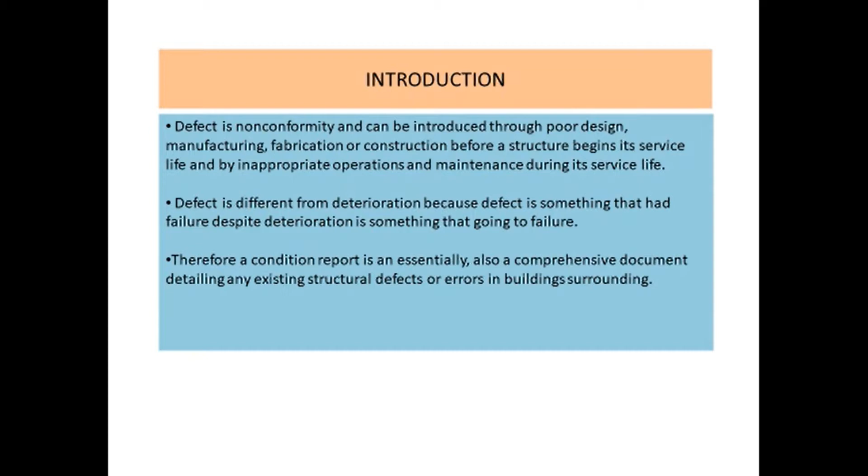About the inspection, this report is about identifying and inspecting the defect found in the arena UPSI, located within the compound of UPSI. The defect investigation was convened on Thursday, April 27, 2017, and it consists of 20 students and a lecturer in the master program. General briefing from UPSI officer started by welcoming our delegation, giving background on UPSI, and introducing the organizational structure and whole facility that UPSI has to be utilized by users.

Three major areas were determined for each group. During the inspection, the weather condition was hot and sunny.

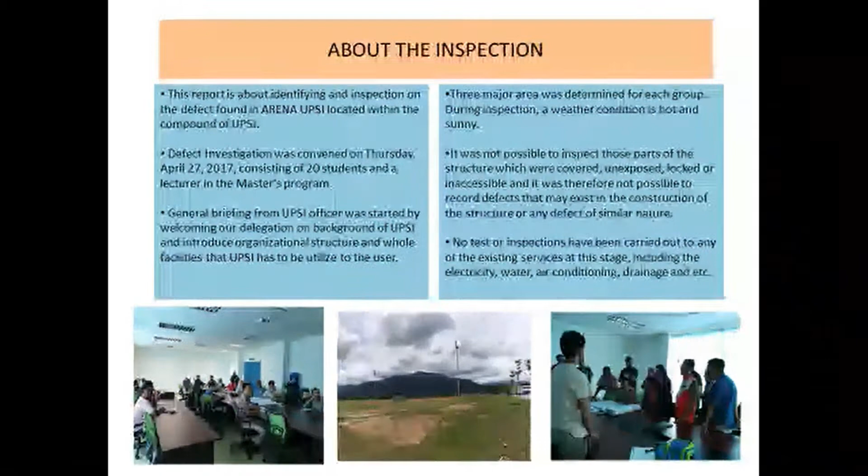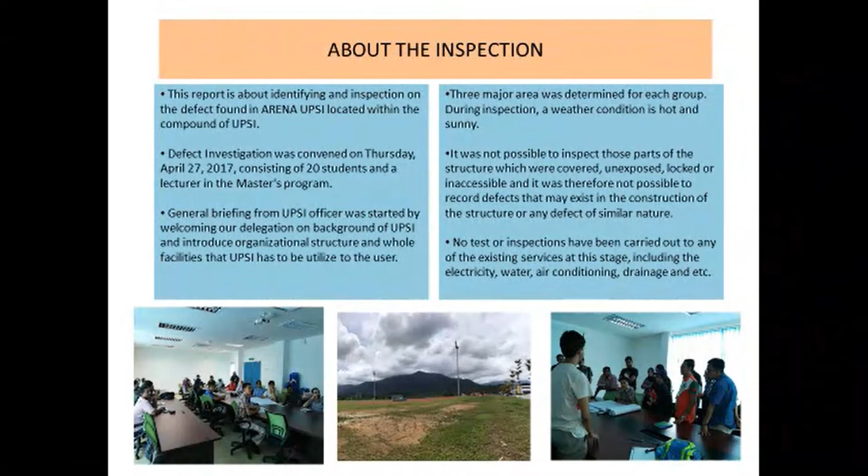It was not possible to inspect those parts of the structure which are covered, unexposed, locked, or inaccessible, and it was therefore not possible to record defects that may exist in the constructions of the structure or any defect of similar nature. No tests or inspections have been carried out on any of the existing services at this stage, including the electricity, water, air condition, drainage, and etc.

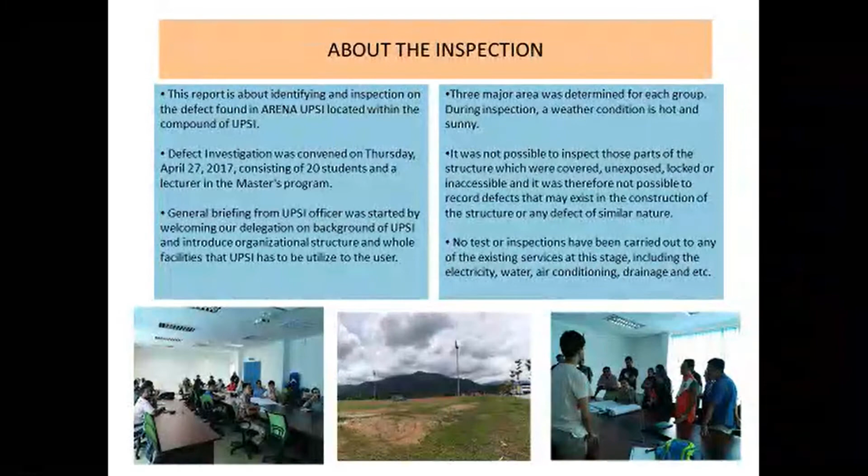The aim and objective of this inspection: first is to develop a more practical understanding of building surveying. Second, to diagnose defects using appropriate measurement techniques by exploring the symptoms and real cause of the component flaw in a building. The third is to develop competence in gathering building condition data on site and reporting strategy.

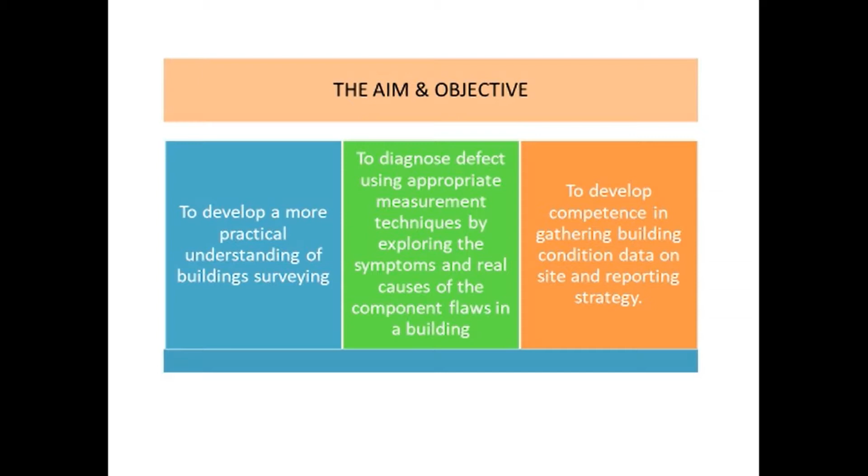As a significance of this report, it will benefit parties involved in UPSI, especially top management, to identify performance measurement needs in the management of outsourcing contracts such as cleaning.

Secondly, through this performance measurement study, it may provide UPSI an approach for systematically collecting, analyzing, utilizing, and reporting on their service. Lastly, the result and finding from this study will provide new knowledge that can be adopted to improve the next cycles of building contract in UPSI.

University Pendidikan Sultan Idris, or commonly known as UPSI, is a public university situated in the central region of Peninsular Malaysia at Tanjung Malim, Perak. The distance between UPSI and the capital Kuala Lumpur is around 80 km, taking around a 1 hour journey. It was first established before World War II in 1922 as Sultan Idris Training College, or SITC.

This institution is one of the oldest in the country, and has been through several eras to become a university. After the era of SITC, it was upgraded to Maktab Perguruan Sultan Idris, or MPSI, in 1957, shortly after independence. Later, it was upgraded to Institute Perguruan Sultan Idris, or IPSI, in 1987, and became UPSI in 1997 until now.

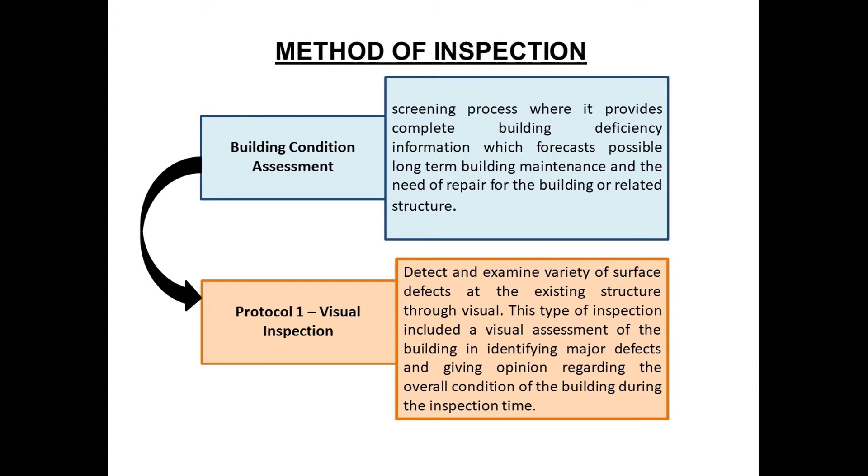We use building condition assessment as our method of inspection. Building condition assessment can be divided into three protocols. First, Protocol 1, visual inspection. Second, Protocol 2, non-destructive test. And Protocol 3, destructive test or detailed analysis study. But for our case study, we only use Protocol 1, which is visual inspection.

The definition of building condition assessment is a screening process that provides complete building deficiency information, which forecasts possible long-term building maintenance and the need of repair for the building or related structure. The definition of visual inspection is to detect and examine a variety of surface defects on the existing structure through visual means. This type of inspection includes a visual assessment of the building in identifying major defects and giving opinion regarding the overall condition of the building during the inspection time.

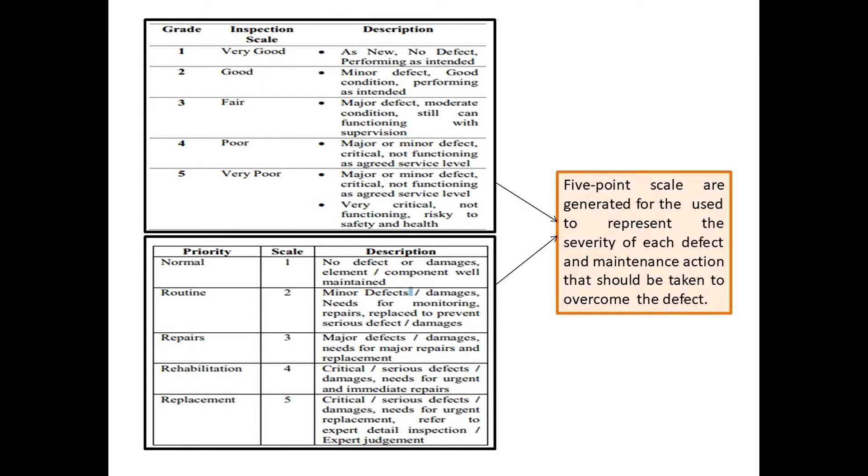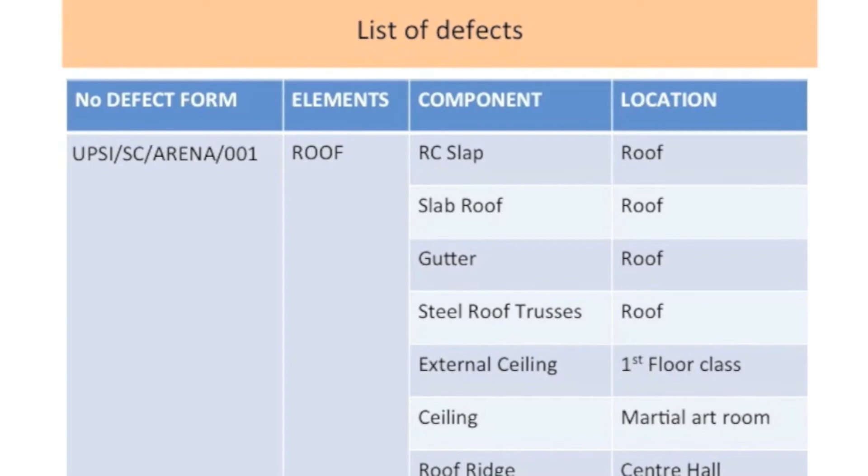In this section, we're going to talk about the list of defects discovered during our inspection of the building, specifically the defects discovered in the roof. There are several components to be named and mentioned in this section. The first components to be talked about are reinforced slabs, slab roof, gutter, and also steel roof trusses, the external ceiling, the main ceiling, and also roof ridges.

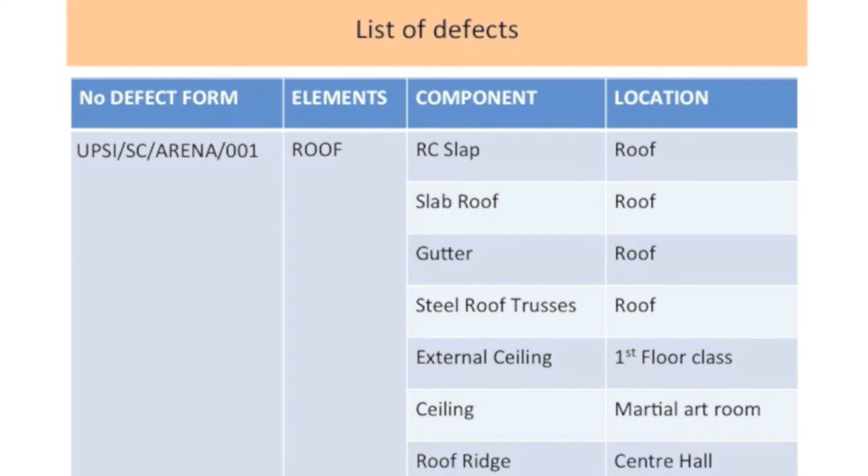The location of these defects are mainly on the roof, except for the external ceiling that is located on the first floor class, the main ceiling that is located at the martial arts room, and the roof ridges located at the central hall.

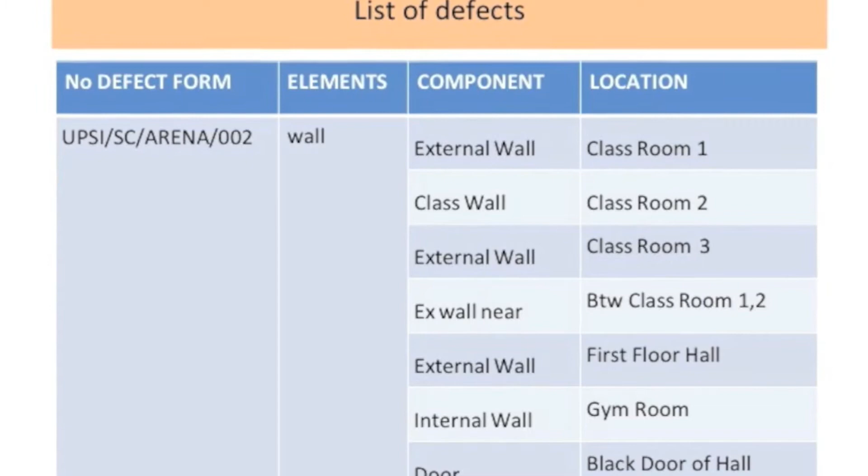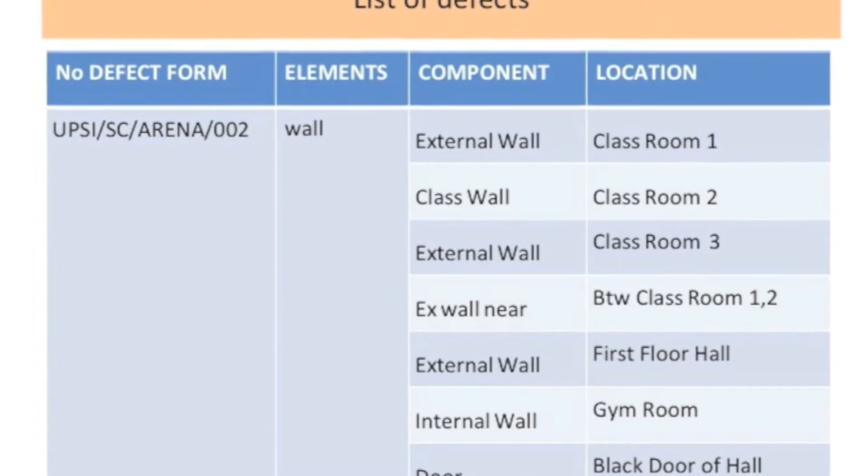In this section, we're going to talk about the defects discovered on the wall. As mentioned earlier, there are different components to be mentioned. The first one is the external wall, then the class wall, the external wall near class between 1 and 2, and also the external wall at the first floor hall, the internal wall at the gym room, and the back door of the hall. So these are the list of defects that have been discovered on the wall.

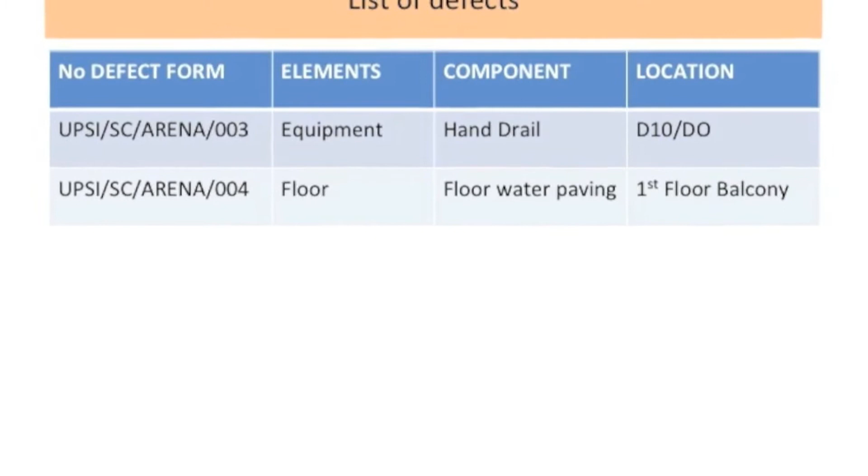In this section, we only have two defects to mention: one on the elements of equipment, and the second on the floor. For the equipment, we have it on the handrail, and on the floor, we have it in the floor water paving located at the balcony on the first floor.

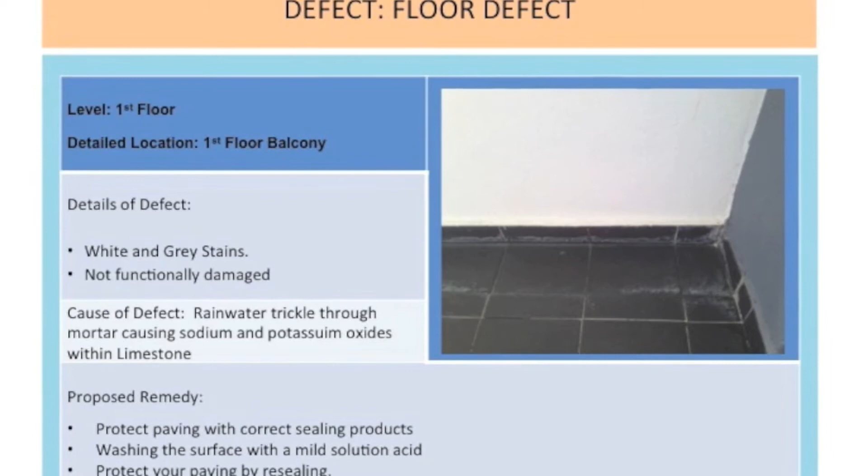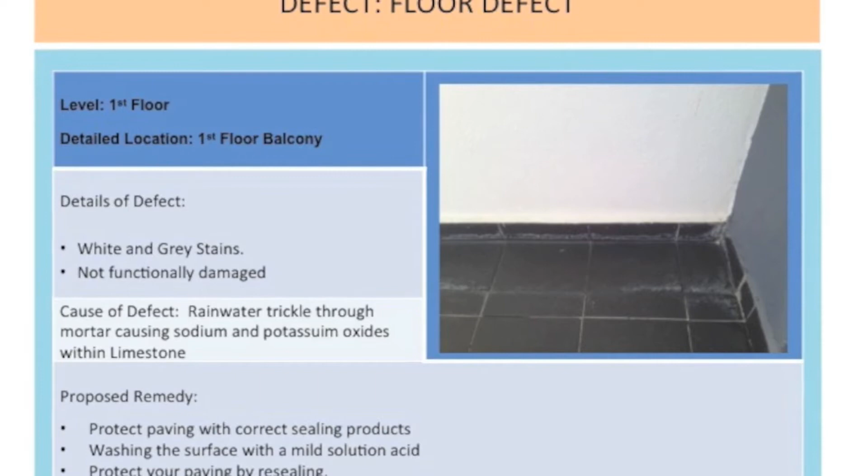In this section, we're going to talk about the defect discovered on the floor, specifically on the first floor balcony, on the water paving. Details of the defect would be white and gray stains located at the water paving, considered a non-functionally damaged defect. Causes of the defect would be rainwater trickling through the mortar, causing sodium and potassium to oxidate within the limestone. The proposed remedy will be to protect the paving with the correct sealing products, wash the surface with a mild acid solution, and then protect the paving again by resealing it once all the procedures are done.

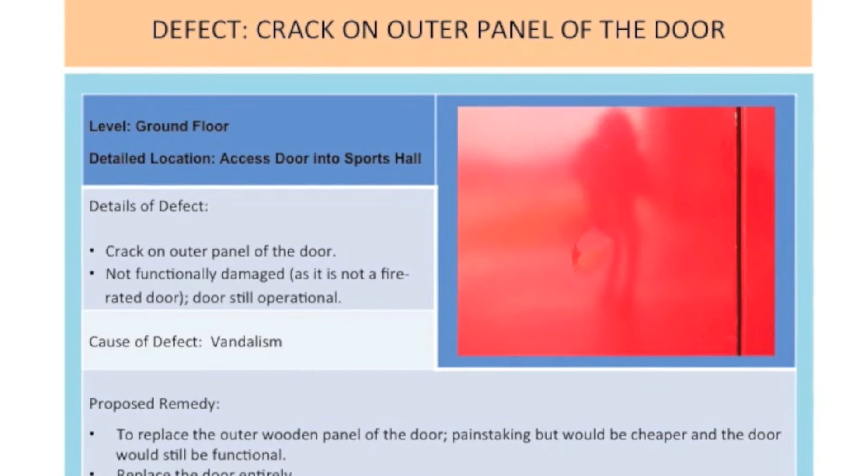The next defect, located at the Arena Sports Hall, was a crack on the outer panel of a door. This door is located on the ground floor and is the main access door into the sports hall. This door is not functionally damaged, as it is not a fire-rated door; it is still operational, but more unpleasant aesthetically. The cause of this defect would be due to vandalism. To remedy this defect, there are two options. The first would be to replace the outer wooden panel of the door — a time-consuming and painstaking job, but a cheaper alternative as the door would still be functional. The second remedy would be to replace the door entirely.

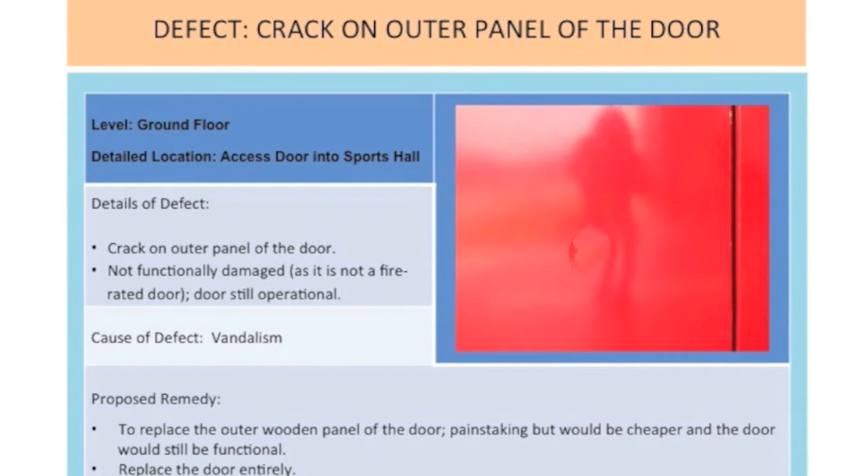The next defect is a detached electric wall socket. It is located on the first floor of the building, along the corridor outside the classrooms.

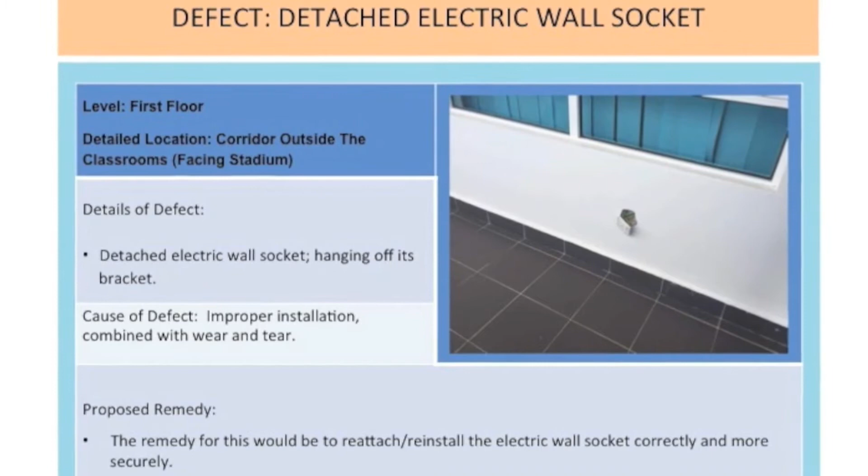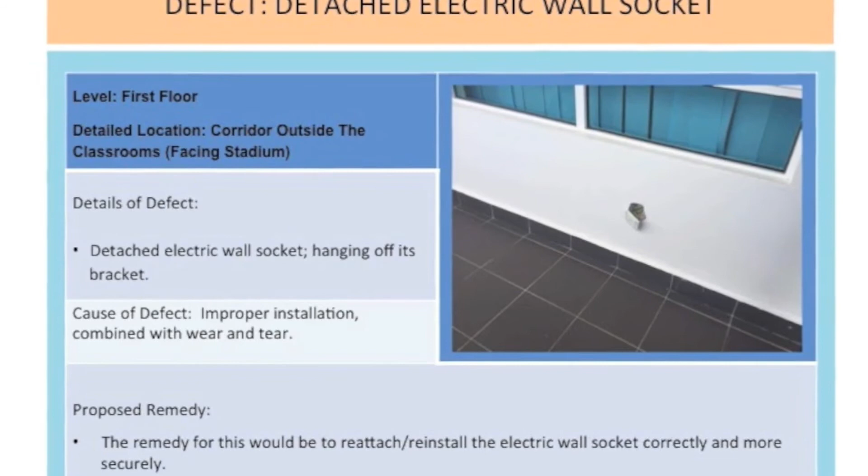The condition of it is that it is detached and hanging off its bracket, actually hanging off its wires. The cause of this defect would be due to improper installation combined with the usual wear and tear. To remedy this, it would be best to reattach or reinstall the electric wall socket correctly and more securely.

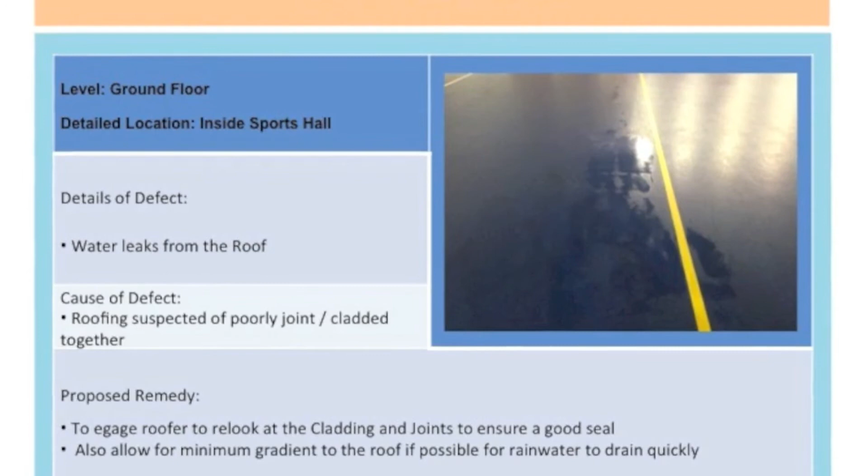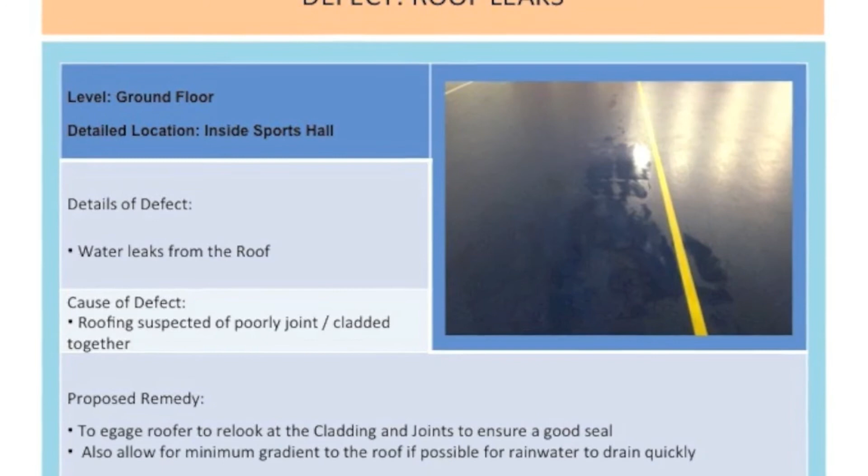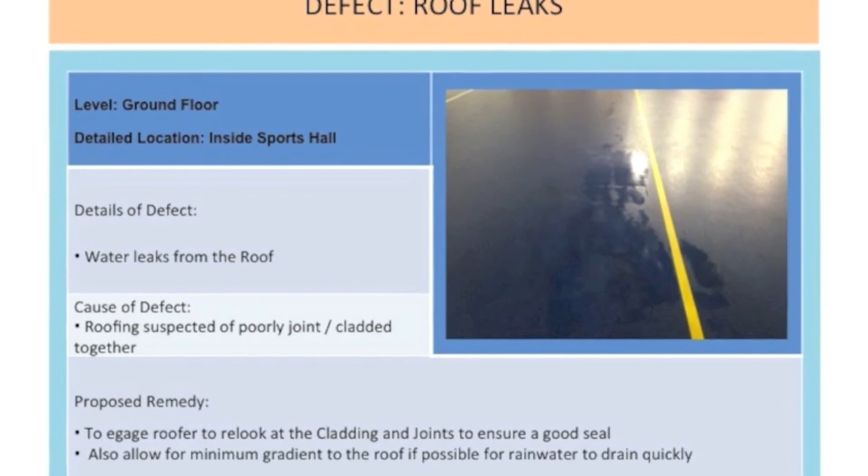The following defect was observed inside the sports hall itself, where we noticed that the flooring was wet. The cause of this would be due to a leaking roof, whereby the roof was probably poorly joined or the cladding was poorly put together. The proposed remedy for this would be to engage a professional roofer to investigate the actual cause and to further inspect the seals of the roof joints to see if they were sealed properly and sufficiently.

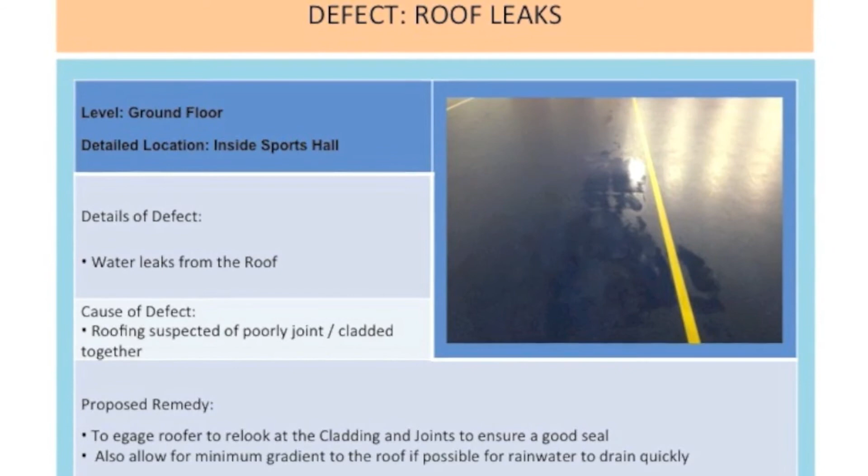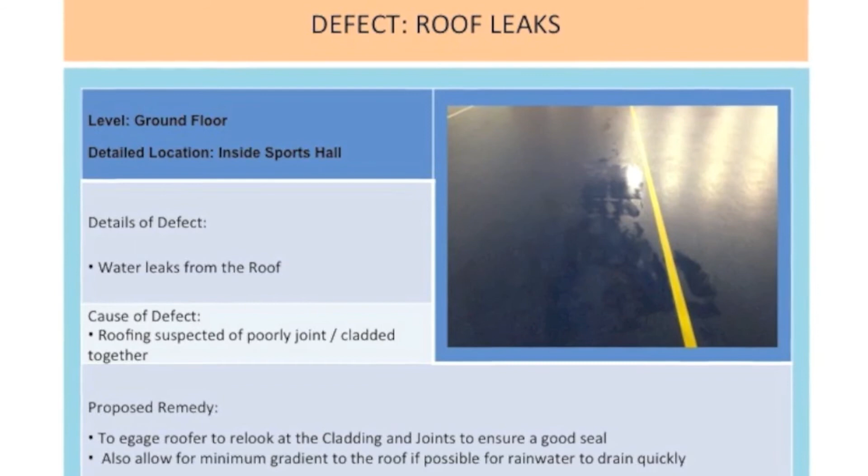This is because it was located at a point that was inaccessible to us, so we were not able to investigate this in much detail, and if possible to inspect the gradient or to increase the gradient very slightly to increase the efficiency of the rainwater draining away.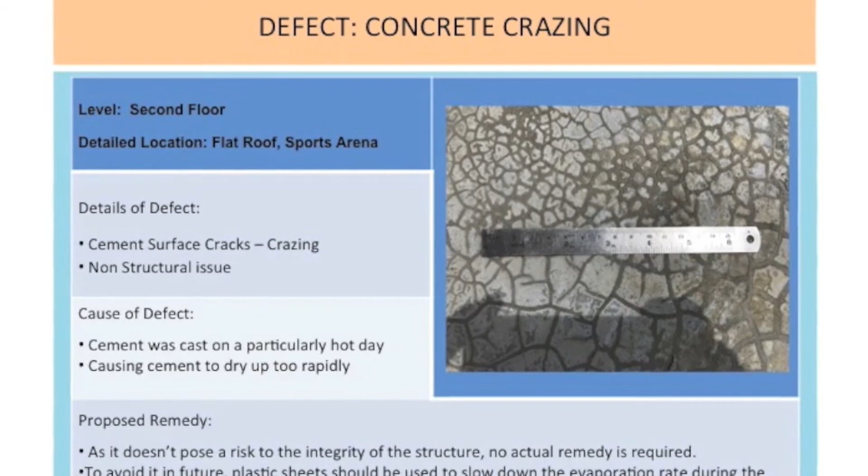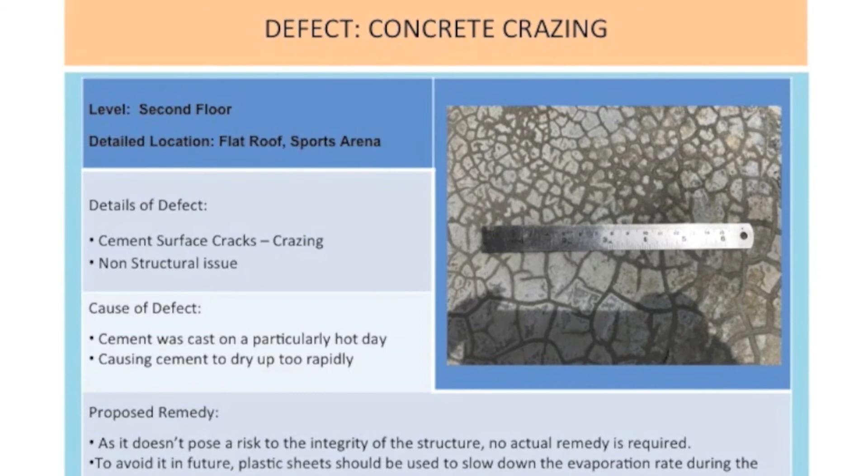In terms of remedies, as this concrete crazing does not pose a risk to the integrity of the structure, no actual remedy is required. It is just something that looks unsightly. To avoid it in future, plastic sheets could be put over the concrete after it was just cast, and this would help slow down the evaporation rate.

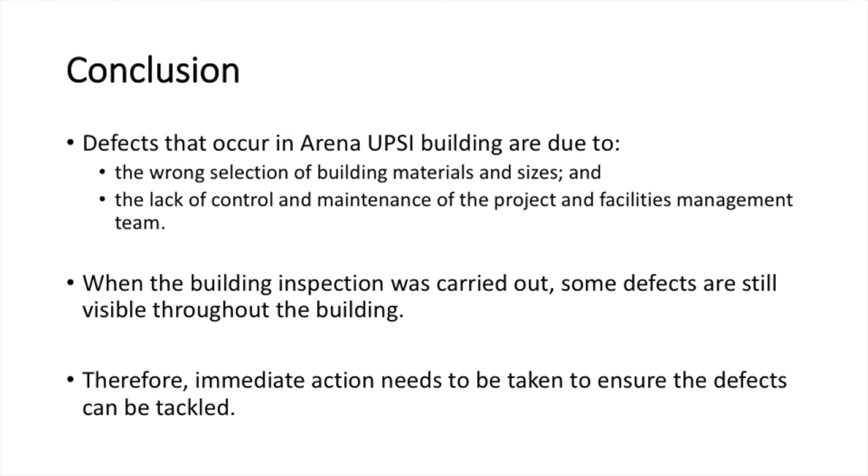Conclusion and recommendation. Defects that occur in Arena UPSI building are due to the wrong selection of building materials and sizes, and the lack of control and maintenance of the project and facilities management team. When the building inspection was carried out, some defects are still visible throughout the building. Therefore, immediate action needs to be taken to ensure the defects can be tackled.

As we can see from the defect investigation form in Chapter 3, most of the defects found in the building are minor defects, but there are two major defects that also occur. The building has major defects such as corrosion on the roof trusses and poor selection of materials and sizes for roof gutters. This gives impact to the building structure and overall performance of the building.

The main source of the building defect is the poor selection of roof gutter materials and sizes, causing the risk of gutter overflow from insufficient drainage capacity, and leading to dampness on the building walls beneath the roof gutter. The repairs and replacement need to be carried out soon to improve the aesthetic and general performance of the building.

On the other hand, the type of minor defects found in the building are such as dampness, efflorescence, paint peeling, stain, crazing, horizontal cracks on walls, and etc. The building defect that was considered minor at this point in time causes aesthetic repairs on the building envelope. These defects were mainly caused by design fault, natural exposure to environment, poor workmanship, and etc.

The identified defects should be prioritized and promptly rectified according to the facility needs so that the facilities inside Arena UPSI building can be effectively maintained and managed in a more sustainable manner.

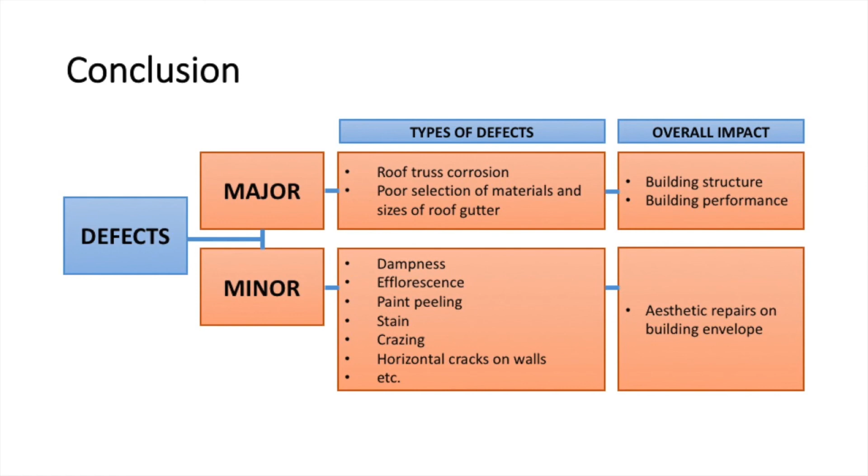Recommendation. Overall, the building is of minor defects. However, action must be taken to overcome these defects. Good teamwork and collaboration between the building consultants should be carried out in the reconstruction, redevelopment, or extension of the building in the future.

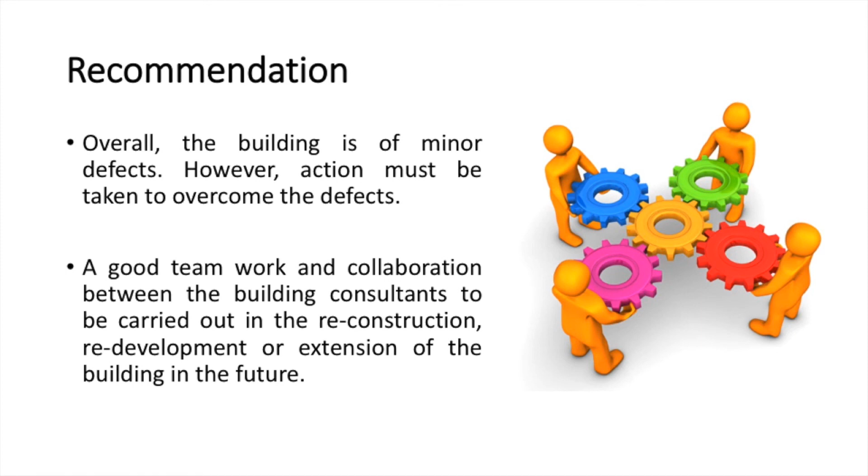Hire a good contractor when doing the rectification works, as we can see some of the defects resulting from poor and substandard quality of workmanship, such as that of horizontal crack on walls. Periodic maintenance works should be done by the team to ensure that the building is maintained well to ensure its functionality and performance.

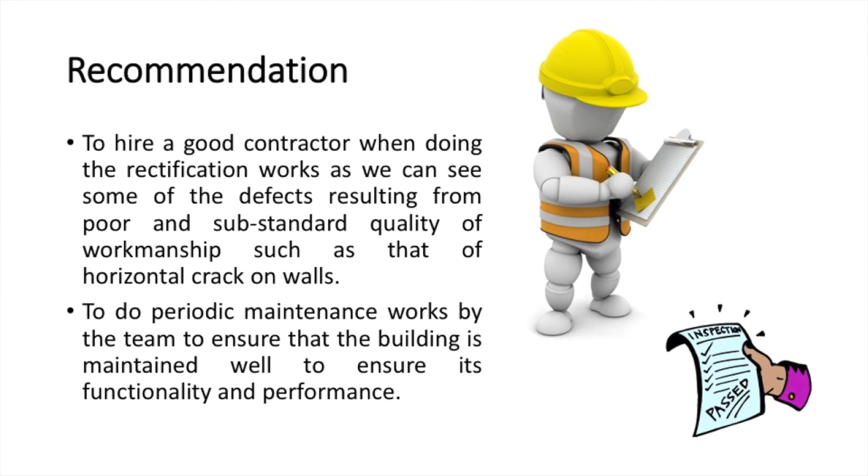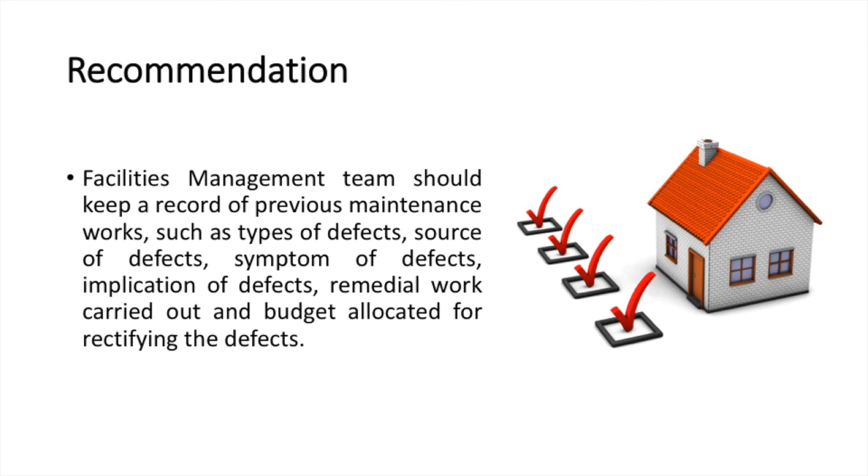The facilities management team should keep a record of previous maintenance works, such as types of defects, source of defects, symptom of defects, implication of defects, remedial work carried out, and budget allocated for rectifying defects. All this information is useful for future building maintenance jobs, and they act as preventive maintenance for the facilities management team to foresee any potential damage to the building.